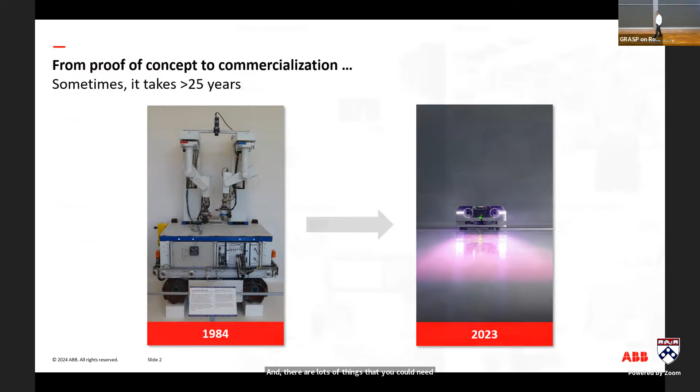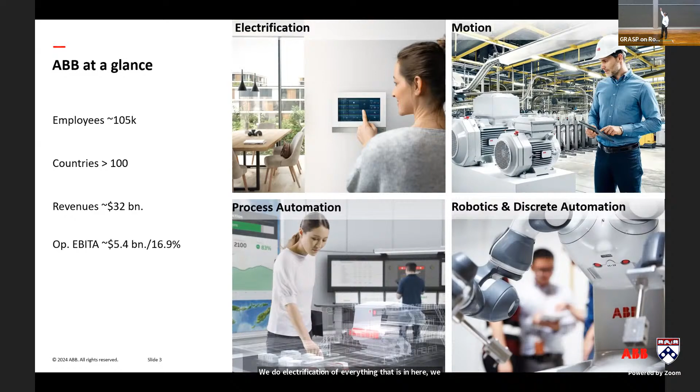There are lots of things you need to consider between the proof of concept and when it actually works. So, our company, we are a large technology company. As ABB, we do process automation—that means we monitor plants, power plants for example. We do electrification of everything that is here. We have the business of motion, and I lead Robotics and Discrete Automation, which, as Kostas mentioned, is about 11,000 employees. We're in 50 countries, and we basically sell robots, but also the solutions around them. That's something I would like to dwell a little deeper on.

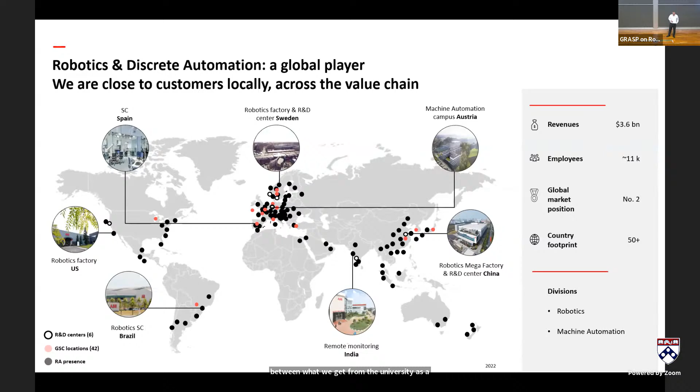How are robots actually embedded in the industrial world? What does it mean for a company? And what is our role between what we get from the university as science, and how we deliver that and make it real for our customers?

So you put it in and the robot runs. This was the first programmable one. It worked for more than 40 years until the company actually did not exist anymore, so they had to shut it down. But it was quite robust—40 years is a quite long time.

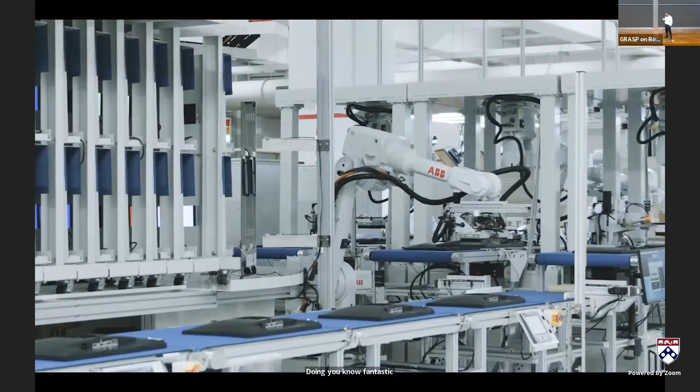And this is how robots really look today. These are applications in automotive where you coordinate multiple robots doing fantastic production enhancements for our customers. So a long way from the initial robotics to what we see today.

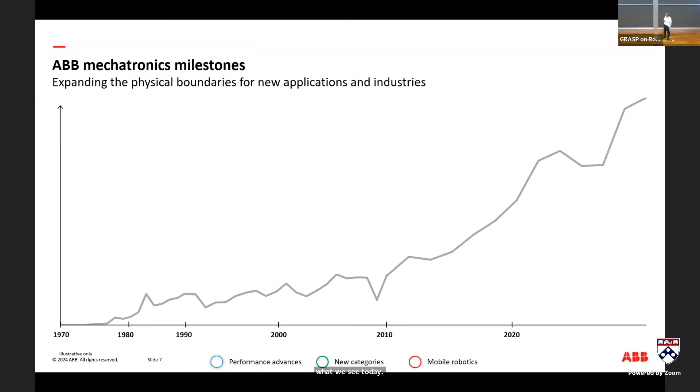Now what happened over the years? These are the number of robots that I'll show you later, why they went up over time. But first, from a robot perspective: 1974, first robot. And then we had many advancements of the same type, either 4 or 6 axis robots.

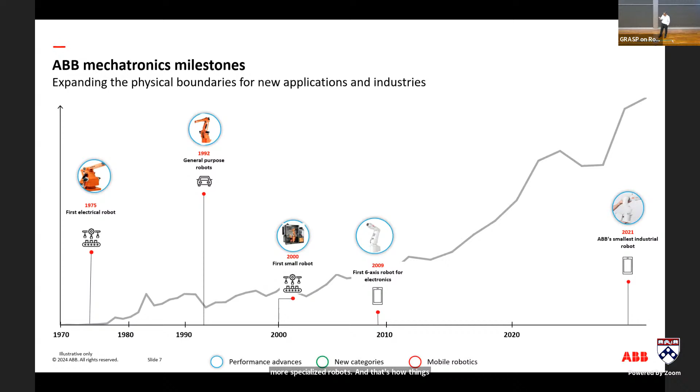And then over time, we saw that there is a need for much more specialized robots. And that's how things were created, the need for not only 6-axis, but others. You can see the first electric drive paint robot—I'll tell you why it's a little bit different using a paint robot than a classic robot.

Delta robots are the pickers. And then we had the smaller robots, the SCARA robots for electronics. First dual arm robot, and then hygienic robot for food and beverage. And then the GOFA, which is a collaborative robot.

Collaborative robots you might probably know about. It's how you interact with the robot—you put it in a place and it interacts with the human. It's also a very specialized robot.

And then we had the autonomous mobile robots get into the industrial world, where you mount a robot on a platform. Now this is the evolution of the mechatronics.

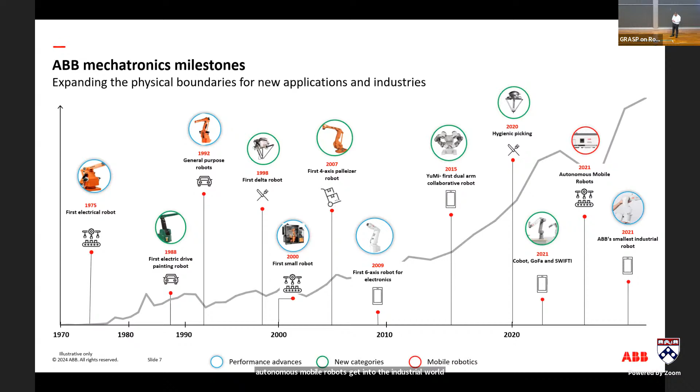But what helped was the evolution of the software as well. First was the whole development of the underlying microprocessors, and that was key to enable robots to actually be programmed. Today it sounds normal, but having a platform to program on was something very unique until the 1990s.

And then there was a whole movement of new software that enabled us to do more new applications. Pickmaster is basically software that allows fast picking of food, or the Robot Studio, which is something I will dwell on deeper.

Robot Studio is a simulation tool that was fundamental for the development of robotics. We use it basically to do everything virtually before we even do implementation. Even the PLC code that we develop on Robot Studio is actually the same runtime.

This is absolutely critical because when you go to a customer and tell them, 'well, this line I will fully automate,' the customer will say, 'what does that mean? I have a running system, don't touch it.' So we show it beforehand, we simulate, we exercise all the safety aspects, and when the customer feels comfortable, we actually use it. So that was critical for the development.

And then we had virtual commissioning, easier programming, which started in the last 5 years. Easy programming is quite important for the development of robots because the complexity of programming a robot is quite immense. And then we put Robot Studio on the cloud, so multiple sites can work together.

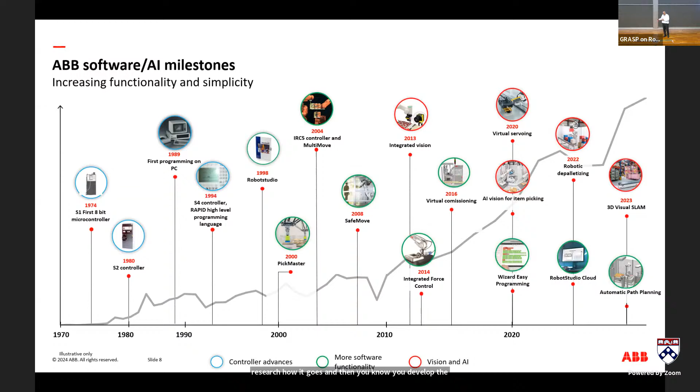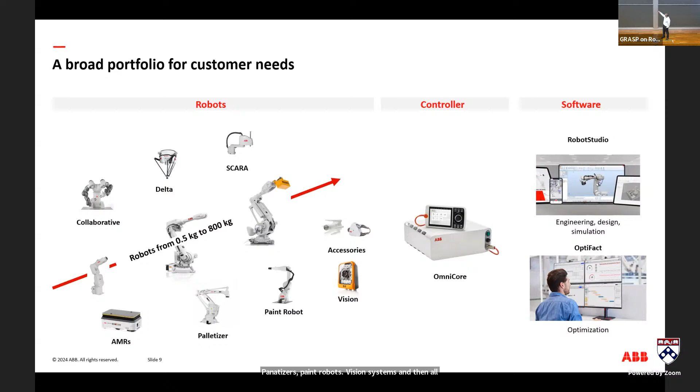So what do we sell today? I thought it would be interesting for you to see, from the platform: AMRs, palletizers, paint robots, vision systems, and all types—we have the full breadth of robots today. OmniCore is the platform I talked about, and then we have the design elements.

Just to show you the type of robots, we have smaller ones that go into smaller applications like electronics, and then larger ones that carry higher weights, size of the human, and then the larger ones are palletizers, and the ones that go into the automotive industry could carry up to 800 kilos.

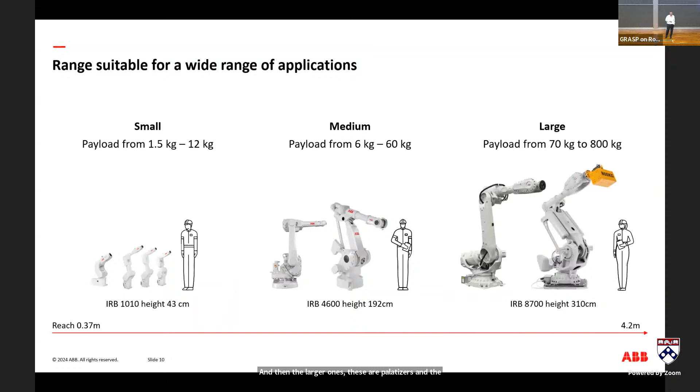And then the huge new generation of collaborative robots, and these were quite important for our customers because when we first automated the parts that don't need humans in the factory, that went quite well. But then we went into the so-called final trim and assembly in automotive, where you have a lot of dexterity, a lot of complexity, unstructured environment. Obviously we would love to have robots that work in an unstructured environment. That means AI would be important, vision would be important, but we're still far away from getting there.

So a solution is a robot that you can basically put and you collaborate with. The robot doesn't harm you if it hits you, but you can also work hand in hand with it. The other reason is that most robots are actually in cages today.

And when you put a robot in a cage, you have to have a perimeter around it that basically takes too much space. But when we go to a factory and see a line that we want to automate, you cannot say, hold on, we will need to expand everything to put real cages around it. It's easier to put a collaborative robot, and the robot will interact with the human, so the human can pass by and so on.

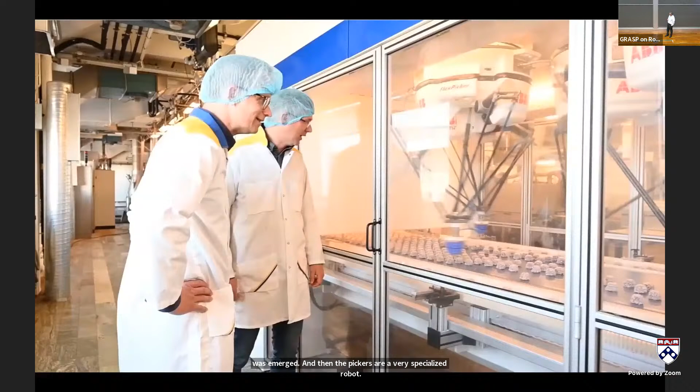That's why the huge interest in collaborative robots emerged. And then the pickers are a very specialized robot that has high speed, can carry 1 kilo, maximum 5-6 kilos, but the speed is about 120 picks per minute, which is 2 picks per second. So a very specialized robot that was needed, and now is really a high runner in the food industry, because obviously you want to pick all these cookies and whatever that is. You cannot have a low speed robot.

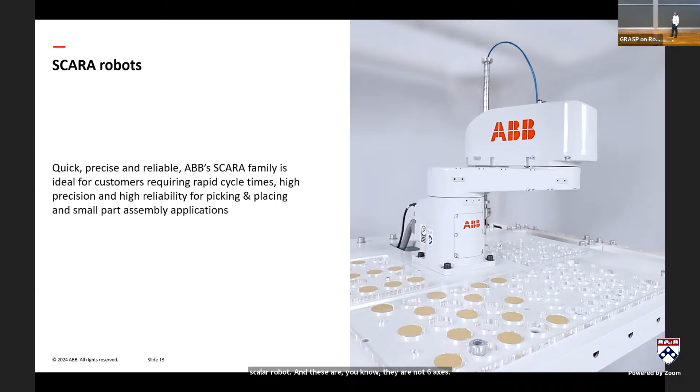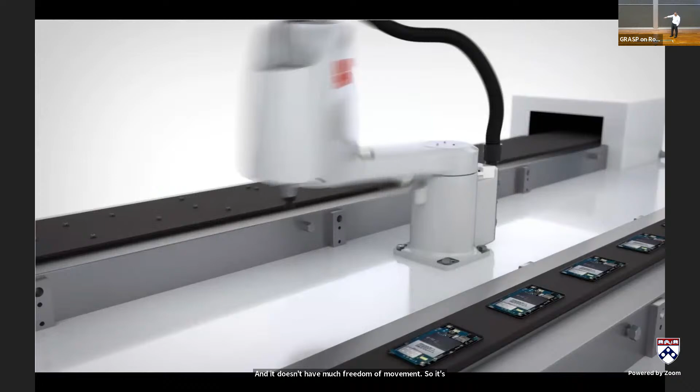And then the other specific application is SCARA robots. These are not 6-axis. This is really a highly specialized robot, highly popular in the electronics business, and it doesn't have much freedom of movement. So basically I wouldn't even call it 3D because it's really planar, but it's called the SCARA robot. And this has a speed of 200 picks per minute, so 3 per second.

Obviously, you have to have the underlying electronics that would tolerate that. But these are all specialized robots that we developed over time for industrial uses. So it's not only the 6-arm that we are all used to in universities. There are multiple others that are there.

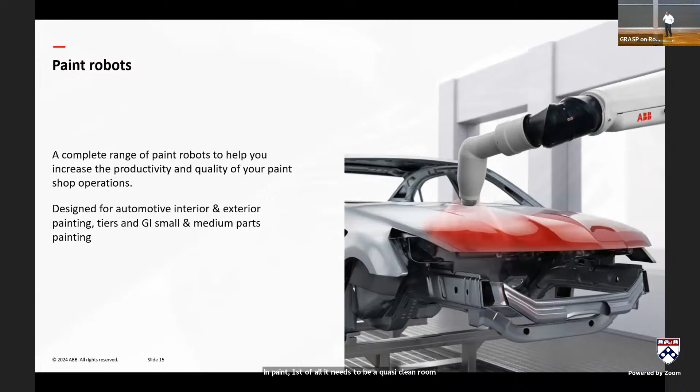Now, the other category is paint robots. You would say, why is this special? In paint, first of all, it needs to be a quasi-clean room where you do painting. And when you see how it works, there's a huge amount of pollution and so on, but the robots, usually to minimize the space, they are mounted on the ceiling or on the side. So they need to be structurally a different robot and need to have much bigger tolerance to the dust and the surroundings, and they need to be highly specialized.

So also this is a very special type of application that we built for automotive that was needed. So it's not always the same robot that is tuned, but really a special application.

Now, what is interesting to see is that tooling in all the examples you saw is key. So we develop our own tools, but we also buy tools like grippers for food. Until today, we did not solve the dexterity problem, which is grab an egg or a cookie, don't destroy it. It sounds easy, and many think that humanoid robots will be around us soon. Let's see - we're not able to do that in industry so far. So we build tools. We build tools to grab things, to cut, to weld, and they need to be really customized to the object that you have.

Obviously, we would love to have something like a hand of a human that has a lot of knowledge embedded in it without being needed to be programmed every time, reprogrammed. So that's also a phenomenon in the robotics world.

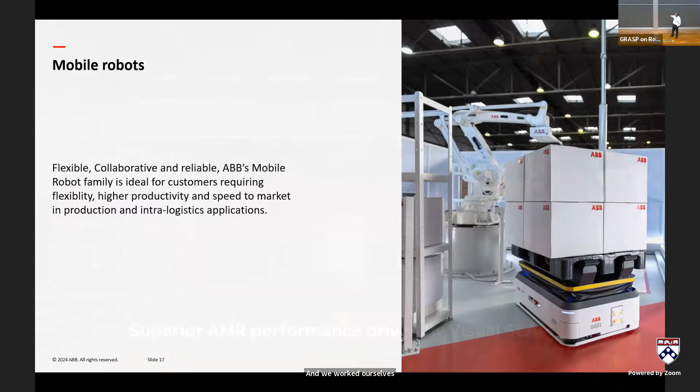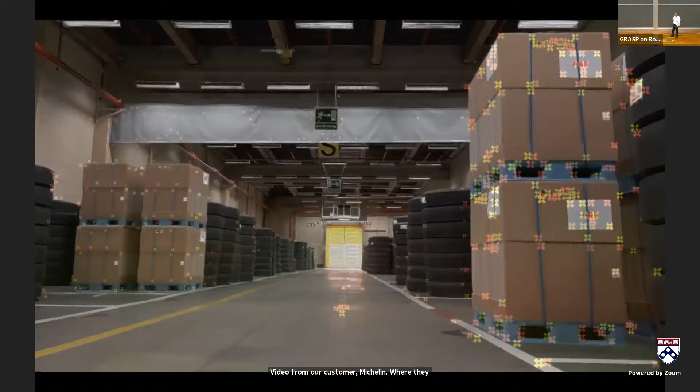And now we bought a company, 7Sense. It's an ETH spinoff, and we worked on the navigation, which is a VSLAM at the end of the day. And now it's working, and it's phenomenal. Customers love it. This is a video from our customer, Michelin, where they implemented it, and it's basically localization by motion.

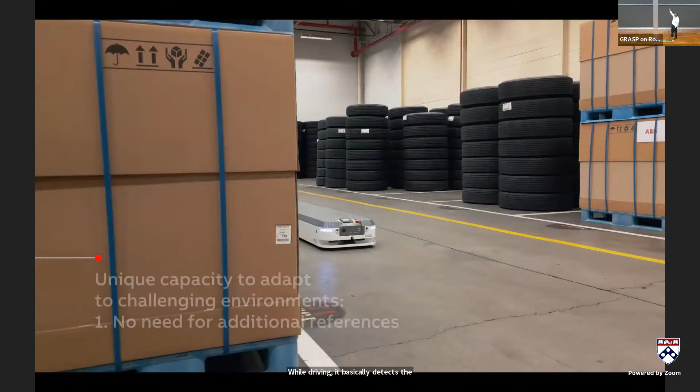While driving, it basically detects the edges and puts it in a map. And while driving, it creates the map, but it also prioritizes the items it sees. For example, if it sees certain boxes, it doesn't put them in the map at high priority. It keeps them as variables. And then it constantly makes it more accurate.

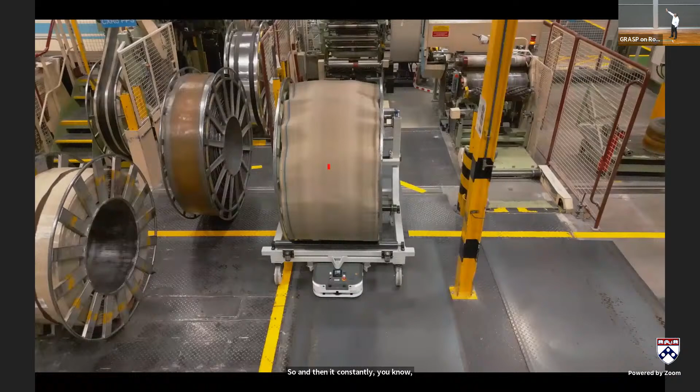And this is purely on vision plus odometry. The accuracy is plus or minus 5 millimeters, which is quite high. Even with slippages, it manages to work around it. I mean, whoever worked on these, I still remember slippage is a huge problem because odometry doesn't help you everywhere.

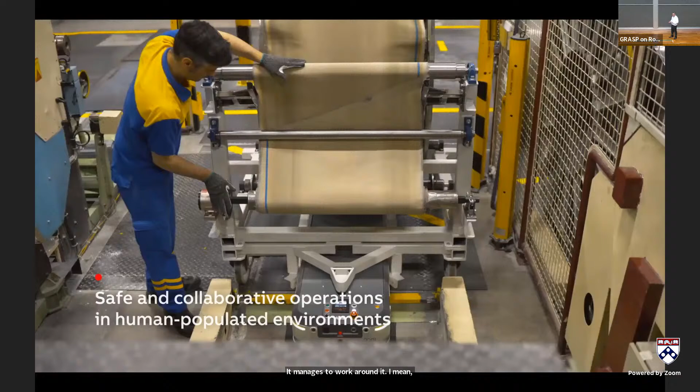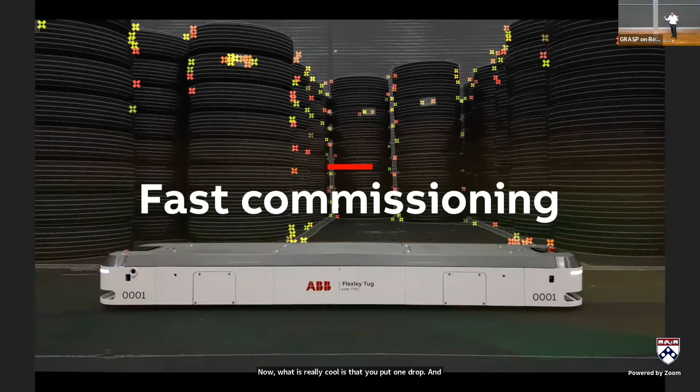Now, what is really cool is that you put one robot and it starts learning, and the other robot in a different part, so they all communicate and create a common map, and then they're able to navigate. It really eases up the commissioning and so on. So Ford loves it, Michelin, and many other customers now.

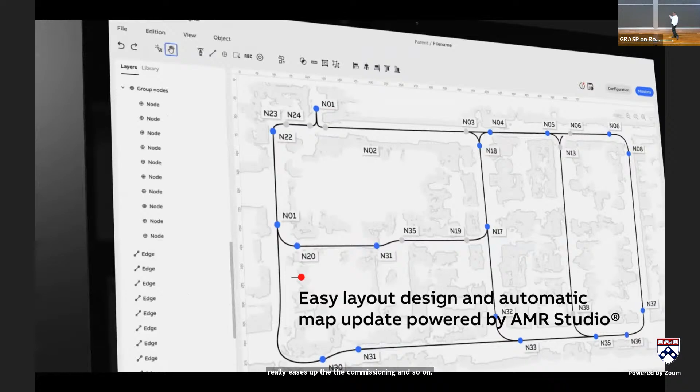And I think, for me, it's also a lesson learned how long it took from initial concept, because what we worked on at that time was basically stereo navigation using landmarks, trying to figure out the model, how to map, and how to map the uncertainty using data fusion. We did that also with Greg Hager and other colleagues, and now it really is working.

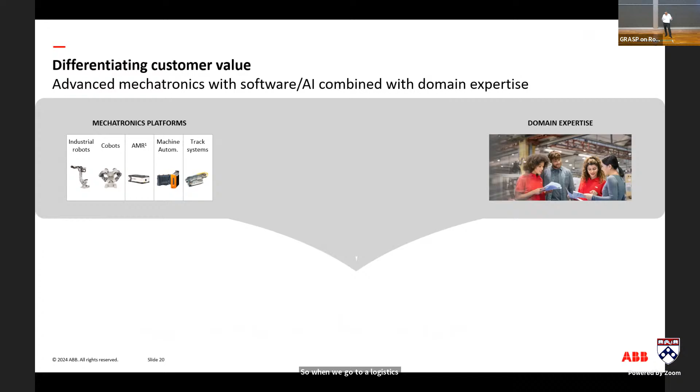Now, what is it that, how do we think about how we create value for our customers? First, we need a platform, which is the robots, the actuation, the mobile. The other thing is we have domain expertise. So when we go to a logistics or any e-commerce company, we need to understand what it means to work in that setting.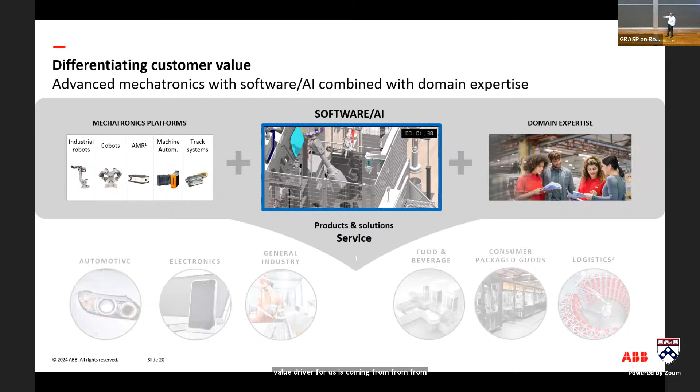And then we have software. Now, over the years, software has become the biggest value driver for our robots. So obviously mechatronics is still important, but the value driver for us is coming from the software. That's how we started in automotive, but then we can model, we can create digital twins, and then we go into other industries. So we started in automotive, electronics, general industry, food and beverage, consumer packaged goods, and logistics.

These are all the new areas of growth. Still, automotive is quite interesting for us, but the shift changed over time from these industries to the others. Now, this is how the technology stack in our robot world works.

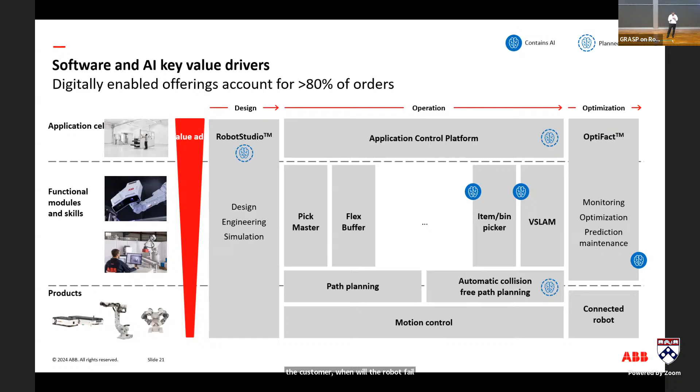We have the product, we have the functional modules, and then we have the actual applications. In parallel, we have RobotStudio for design, the simulation, the motion control, the path planning, and then all the specialized applications that go on top. And then all our robots are connected remotely, so they're born digital. Whenever we install them, they get an address, and we can connect them and get all the information, and we do remote monitoring. We can tell the customer when the robot will fail. We do pattern recognition on them, and these are all services that we provide.

Now, maybe let's go into this. So RobotStudio is basically the software that I talked about. We do the modeling of not only the robot itself, but the whole cell or even the line. And we go through it, as I mentioned, with the customer and show, this is how it would look like. We can tune up the speed.

So sometimes the cycle time of 10 per minute is not enough, they want 20. But then we have to adjust other things. And you see the fences, the safety, all of that is part of the offering that we do. So we cannot just put a robot there with a payload of 30 kilograms, high speed, and without a safety concept for it. So that's how we actually deliver the value to our customers.

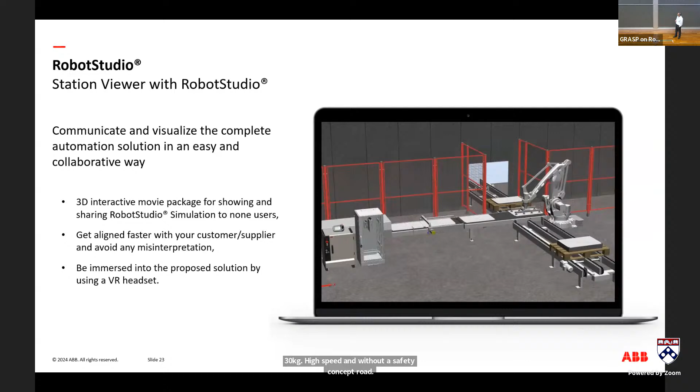And then the newest development of RobotStudio, we have it as an app. So we can go to a customer.

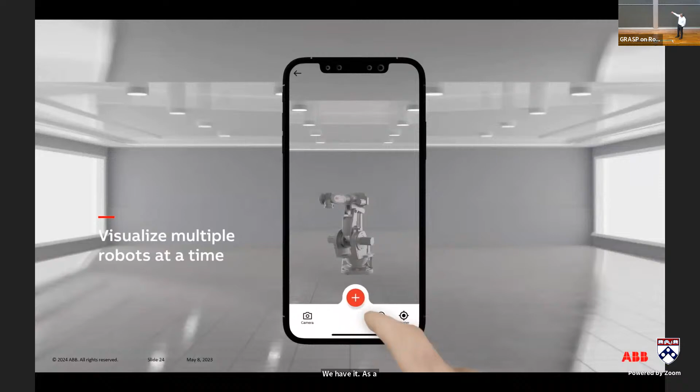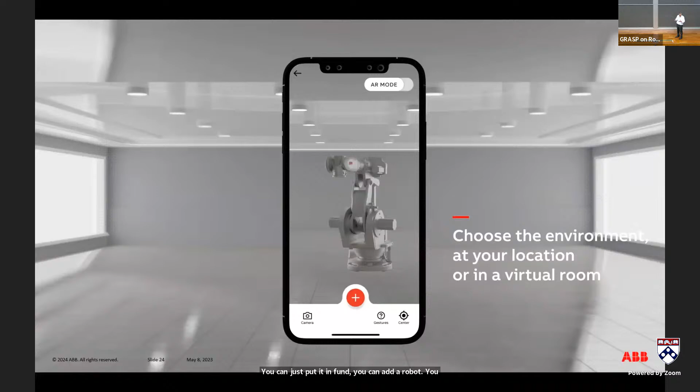You can just put it in front. You can add a robot, pick the one you like, and it's all done virtually. You can basically design the setting for the customer, even add a tray and what have you. So this simplifies for the customer the access to robotics.

You can't imagine how important this is for customers, because this is high tech. When you come and say, I want to put a robot in place, it always creates first anxiety - don't touch a running system. But then we can show that it actually works, it's easy, and so on. That's how we drive the value.

And this is a cool example of how we use RobotStudio and virtual design. We did an experiment with the jungle keepers in Peru, where we helped them with a robot to actually plant trees in the Amazon. It was all remotely done with this AR tool. Just have a quick look.

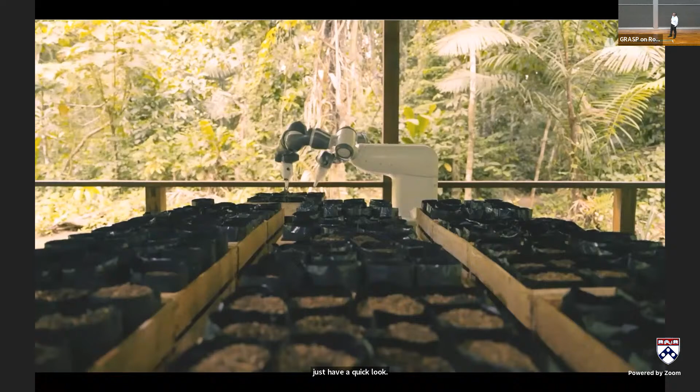So the robot would automatically plant, I don't know, 500, 600 trees per half a day. It was an experiment that we did, and it was quite valuable because people did not want to move in that area. So we put the robot there, and it was really doing the plantation of these small trees. You can think, if you multiply that, how robots can add value in an area where we didn't think that was possible before.

Now, how did this evolution happen? Always you have new technologies that come from universities, from our labs, and we have customer needs - that's where we see the growth coming from.

Over the years, there were interesting patterns. From the 1970s to the 1990s, there was the initial automotive growth, then new variants came in. Interestingly, between 2010 and 2020, there was this hyper growth, which mainly came from China and from electronics. These are the number of robots installed worldwide - we're now above 500,000 robots.

Electronics needs smaller robots, and the value is not as high, but they're smaller. In China, I'll show you later how the density of robots rose to a level that now half of the worldwide installed robots are in China. Every year, 500,000 robots installed in 2022 - 250,000 in China, 250,000 in the rest of the world. So it's the production hub of this planet, which is quite important to know, how these dynamics of this industry actually work.

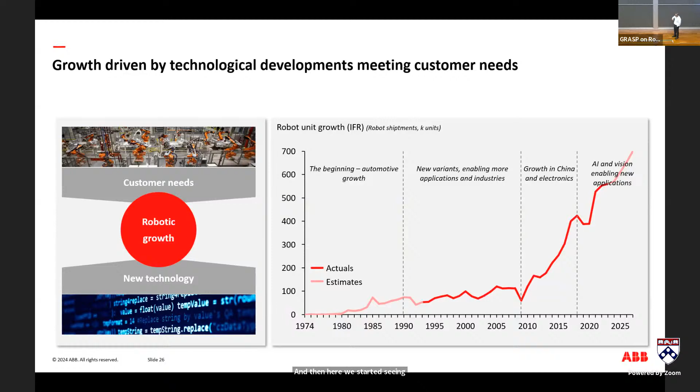Then we started seeing AI and vision driving more applications. Now, what is driving the need for robots? First, it's the individualization of consumer. When you hit the button that you want to buy something from Amazon, you can't imagine the actual chain behind it that makes it happen that you get the delivery next day. It's a huge request on the logistics, on the retailer, and the manufacturing, and that needs robotization.

Digitalization is a big trend. Labor shortage is probably the most important one that is here and here to stay. In the United States, we will have in 2030 more than 1 million open jobs just in manufacturing. There are missing about 300,000 welders in the US. So if you want to reindustrialize the United States, it's not going to happen without the help of robotization and automation.

And then last but not least, uncertainty. After COVID, after all the geopolitical challenges, all countries are trying to reshore, to bring back home manufacturing, and that means you have to add automation. If you want in the United States or in Europe to reindustrialize, you cannot do that because there are no workers. So there will be a huge demand for robotization.

It used to be that productivity and quality were the key drivers in robotics - I wanted to reach more, and the quality to be high. The new drivers are now flexibility and simplicity. Make the robot simple, make it simple to get access, because smaller sized companies don't have PhD workers there who can program the robot, so they need it easy to use.

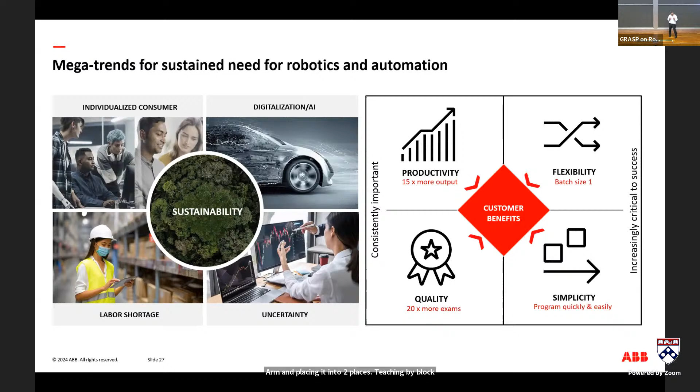We have robots that go into bakeries now, but you wouldn't find engineers sitting there programming. So you have to find easy ways, like teaching by observation, teaching by grabbing the robot arm and placing it into two places, teaching by block programming. These are all areas we are working on to make robot access simpler, and that drives the demand for robotization. The areas we work on in terms of research are autonomy, image processing, mobility, and more analytics and AI.

These are the four areas that we research internally, but we also collaborate with outside, and these are the areas where we also acquire companies or startups. For example, we bought a company that does texture imaging for surfaces and mobility, and we bought a robot company that has mobile robots plus the software and autonomy. We work with universities and others on that.

Now, interesting is to see how is this robot density around the world. There's a figure called robot density, which is number of robots per 10,000 workers. So when people talk about robots killing jobs, the average worldwide is about 180 robots per 10,000 workers. We're not close to robots really taking away our jobs.

They're taking away specific jobs. South Korea is the highest, then Singapore, Japan, and Germany. China really rose from 108 to almost 400 from 2017 to 2022, so they are now at par with most of the others. The US is also catching up and is now the second largest market.

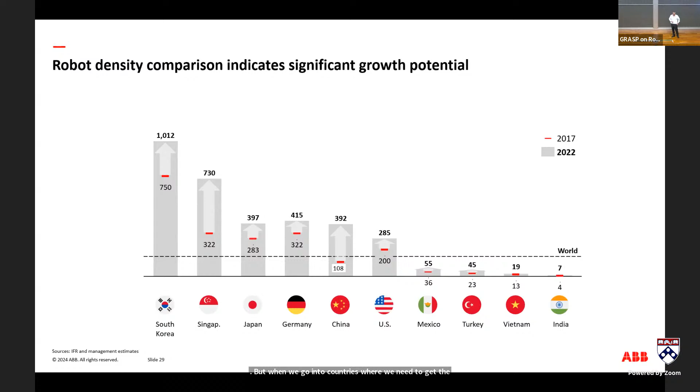But when we go into countries where we need to get the boost, it will not work. We need to have simpler applications. Now, what is interesting is that in 2017, automotive was 123, electronics 122, and the rest was 155.

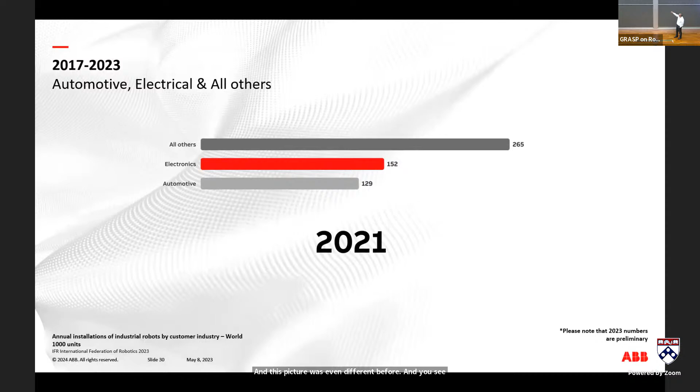And this picture was even different before. You see that all other applications started to increase over time, and then by 2023, we have electronics higher than automotive, and all others the highest. So there's a shift also from demand. Automotive continued to grow, but the other industries like logistics, food and beverage, and healthcare are all on the rise.

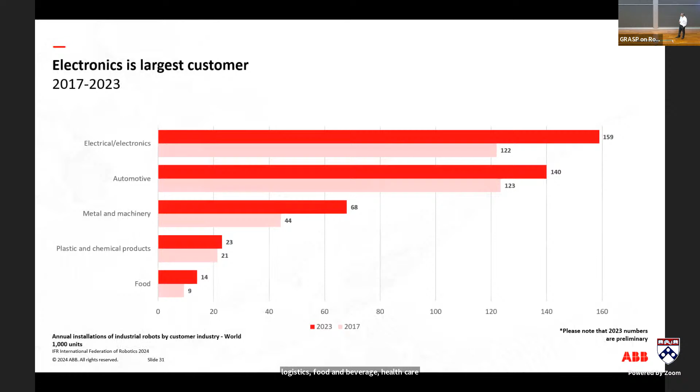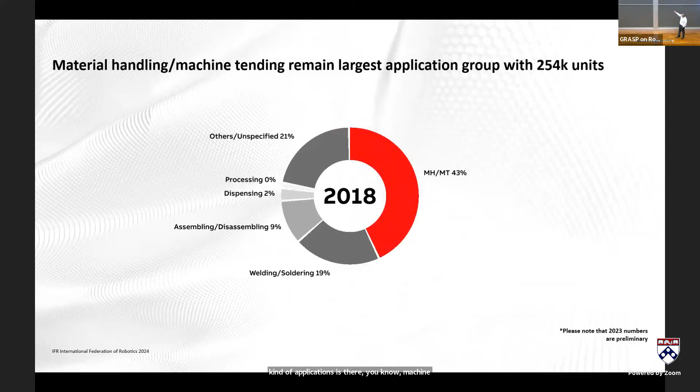If you look at what kind of applications there are: material handling and machine tending is 43%, but that really did not change. Machine handling, which is feeding a machine and handling, was the highest portion. Welding makes about 15-16%. Assembly, dispensing, processing - this is how the applications of robotics actually look like today, which also drives what we need in terms of research and so on.

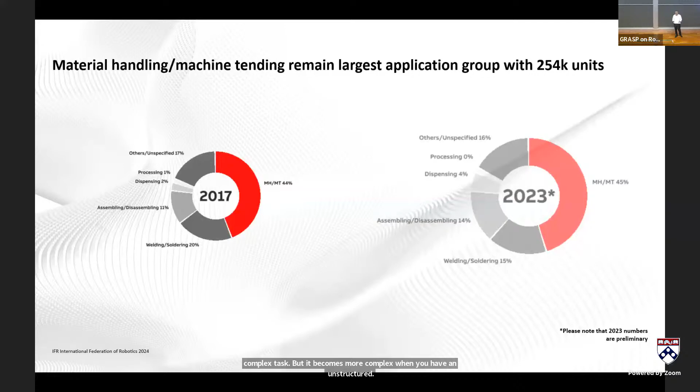We divide applications into two types. One is what we call process, where you follow a path like welding, painting, or pick and place. Pick and place doesn't need as much accuracy, it's a less complex task, but it becomes more complex when you have an unstructured environment, because you want to pick packages for example for e-commerce, and that's where AI will play a bigger role.

How we look at industries is the following: we have industries that are more on the upper S curve, which is automotive and electronics. They continue to drive innovations. For example, now there's a huge demand for battery tray assembly for new electric vehicles, so this is still a vibrant industry for us.

And then we have the ones in the growth area, like food and beverage, logistics, appliances. And then we have rising industries. Construction and healthcare are not new industries, but because of the complexity and unstructuredness of the environment, they have not been addressing automation as much with robots as we would have liked.

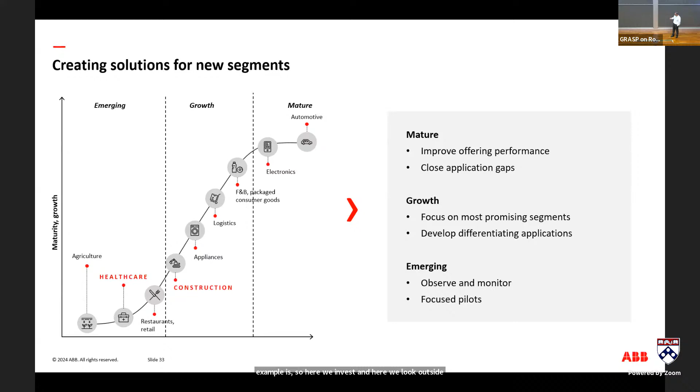Now, an interesting example is construction. Here we invest, and we look outside for partnerships to drive it. Take construction - it's one of the largest industries, with growth of 15 trillion, and a huge amount of global energy is related to the construction industry. So we worked with many companies.

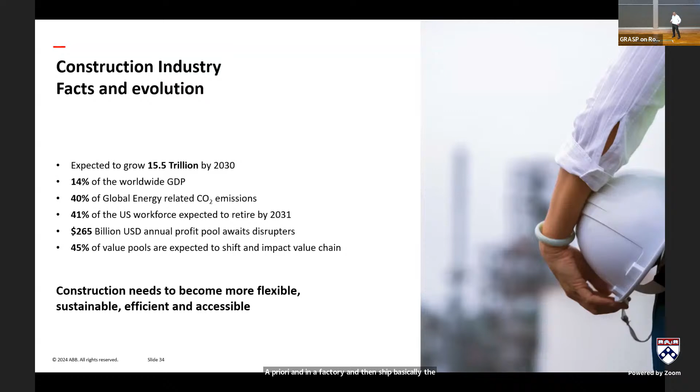How can you manufacture beforehand? How are you going to construct a house a priori in a factory, and then ship the structures to the site and build the house? This is an example where we worked with a customer, Autovol, here in Idaho. Let me let this video run - houses with wooden structure that are pre-built.

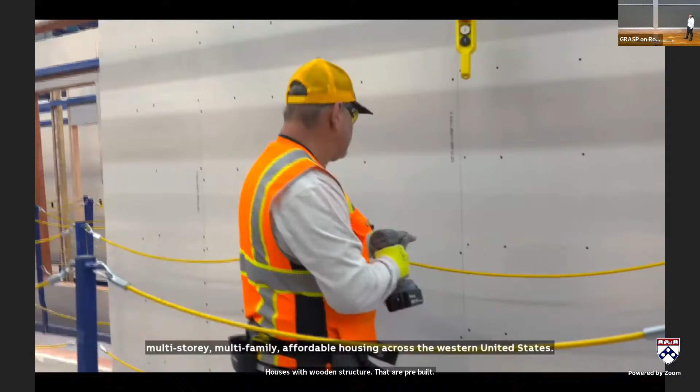Robotics has been a very critical part of all of the stuff.

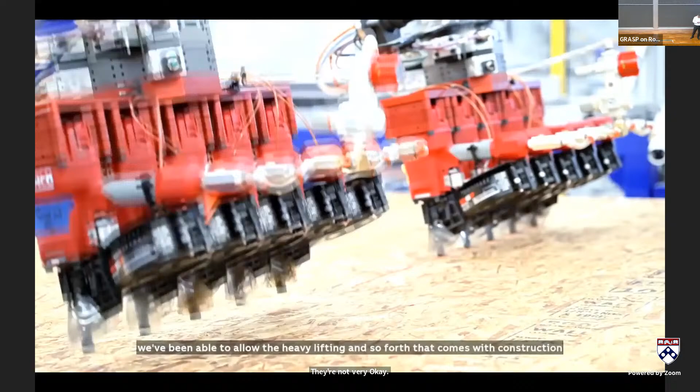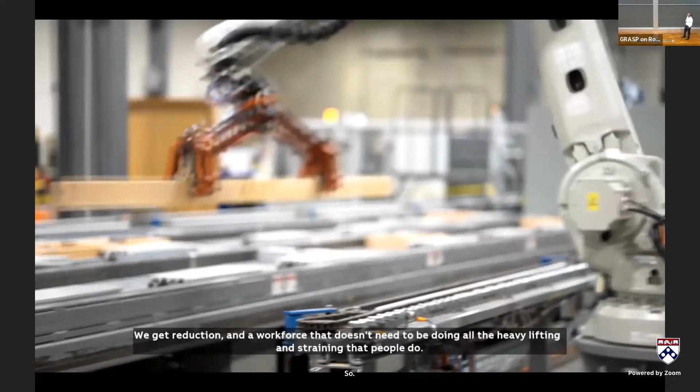A workforce that doesn't need to be doing all the heavy lifting and straining that people do - it's a huge problem to solve. Affordable living, affordable housing, the shortage in labor to provide that, it's not going to get solved unless robotics is part of that solution. So this is an area that is growing rapidly with us, where we work with our customers.

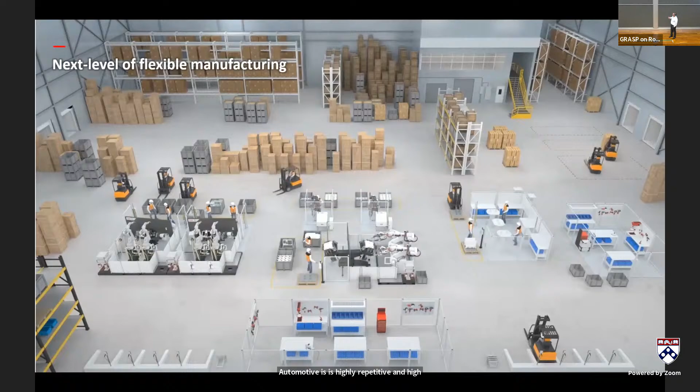In construction, about 25% of what you put on the site is actually waste. So the more you can customize beforehand, you reduce the waste and make it more robust. It's an emerging area, but because that industry is also more unstructured than others, access to it is more difficult. Automotive is highly repetitive and high quality - that's why it was conquered early.

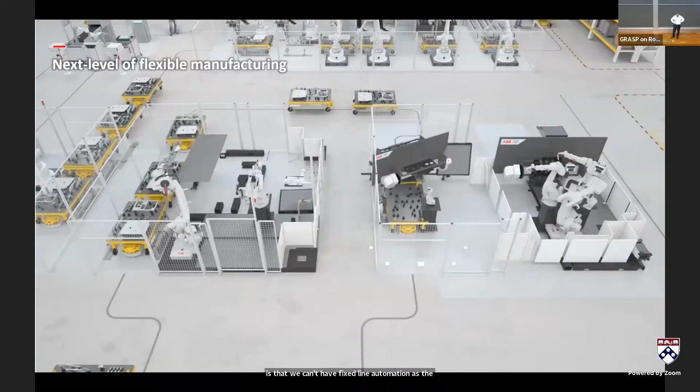The other area that is interesting for us is logistics and how manufacturing will change over time. Mobile robotics in combination with robots are becoming very crucial because we can't have fixed line automation as the standard in the future. We will have cells of automation, and instead of fixed mounted transport, you'll have AGVs transporting material for you. So you have to have coordination between the mobile robots and the robots themselves.

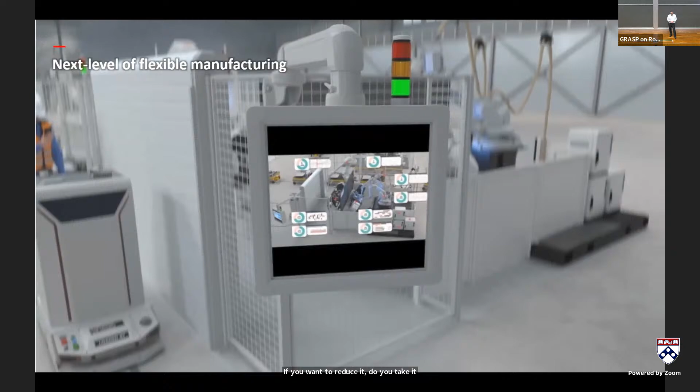If you need more capacity, you can increase a cell or two. If you want to reduce it, you take it out. That's how the manufacturing space will become more flexible. But that means also different thinking - you can't have these fixed lines where robots continue to do the same thing. You have cells fed by AMRs. These are concepts that we work on now with automotive customers to realize.

So when you hit the button to order something, you have to automate retail, consumer-facing fulfillment, distribution centers, and factory automation. All will have a need for automation, and all will be sectors that we would work on.

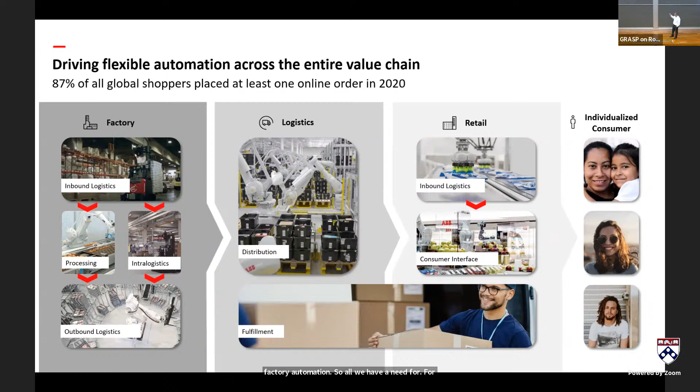An example: usually force sensors are mounted only on the motor, on the wrist side. We added sensors on the load because our collaborative robots, for safety reasons, needed force control at the end so we knew when you touch something. Interestingly, that was a way for us to increase - the accuracy of the robot increased significantly using end sensors at the end effector.

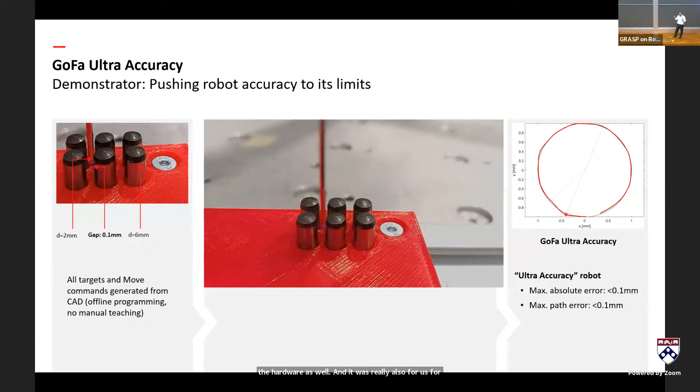This is a movement that was not possible before. It has a tolerance of 0.1 millimeter just by adding a sensor - we didn't touch the hardware. It was really something for us, for the mechatronic colleagues - wow, just by using software and an additional sensor, how much accuracy you can actually increase.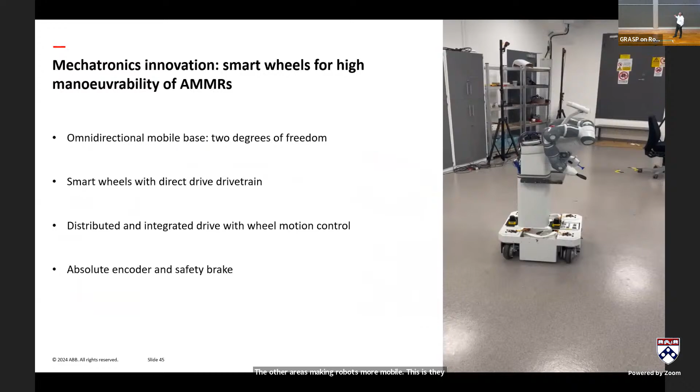The other area is making robots more mobile. There's research we're working on, especially for laboratories, where we need robots that do omnidirectional movement, and we mount robots on them. The other area, which you're quite familiar with, is robots with known items in unstructured environments, and then unknown items in unstructured environments, which would be the holy grail of robotics. These are areas where we're working on.

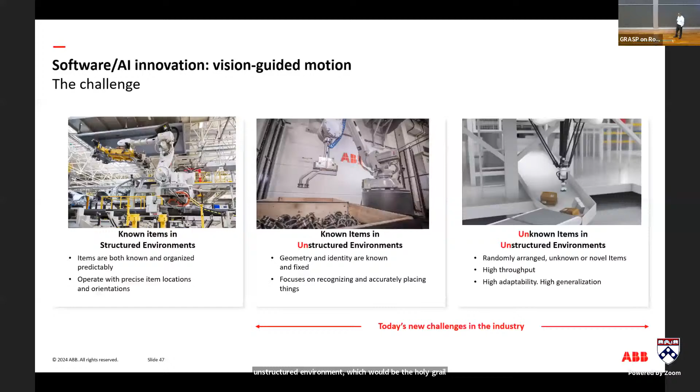And then last but not least, how we can use Gen AI and natural language to... this is in China, where we're experimenting with this.

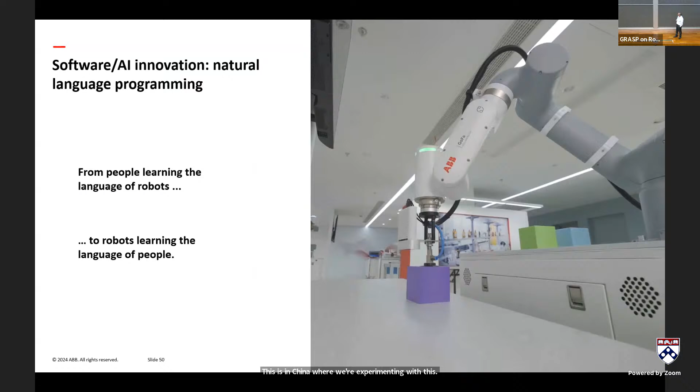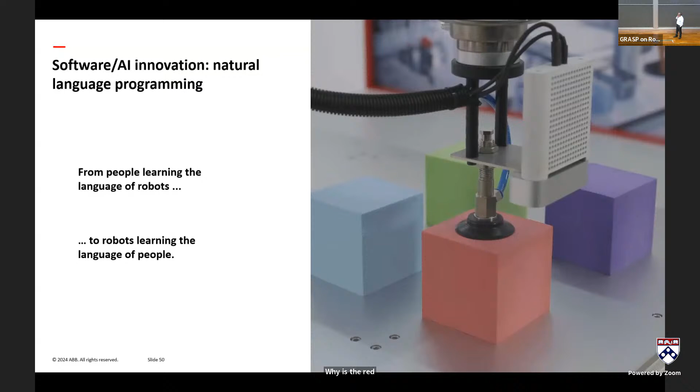For those in robotics, this is not an easy task - to say 'all the box.' What is 'all the box'? How do you interpret what the red box means, or put the red box on the other table? Obviously, using natural language here will be much simplified with Gen AI. This is not available for sale yet - it's an area we're working on. At the moment, Gen AI is a little bit hyped, as if you can solve every problem with it, but I think there will be specific areas.

We all know in AI that you have to basically confine the problem in a certain space, and generalized AI, in my opinion, will take some time. So, but it's an interesting area of work.

So I promised to give you a quick overview of what is happening on the side of AI from a company like us.

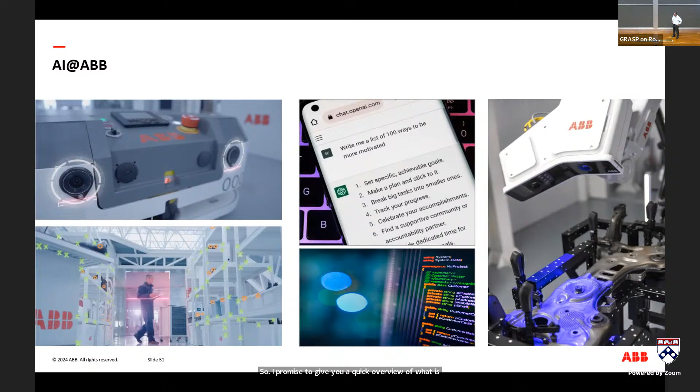Obviously, you know the hypes of AI. I personally think that the maturity of AI has been growing, and we have the AI winters and summers, and we have been researching now for more than 10 years on AI. Obviously, the question is, where will this go? Even if we would have an uptick in expectations or down, the maturity of AI will continue to move. So I tell colleagues, don't get discouraged if this thing will at some point go down. It will. We are in a stage where everything extrapolation is just getting into being too much. But obviously, we know that the maturity of AI will continue to go.

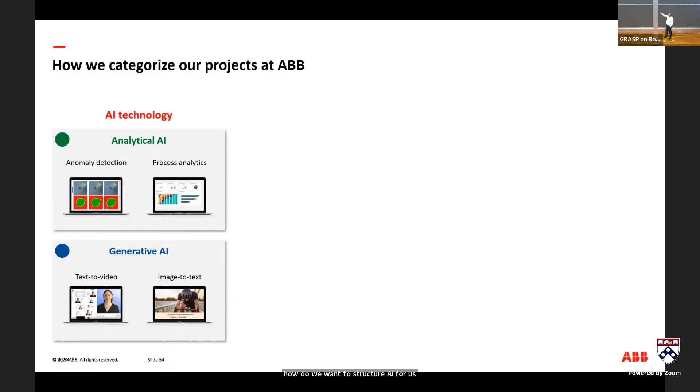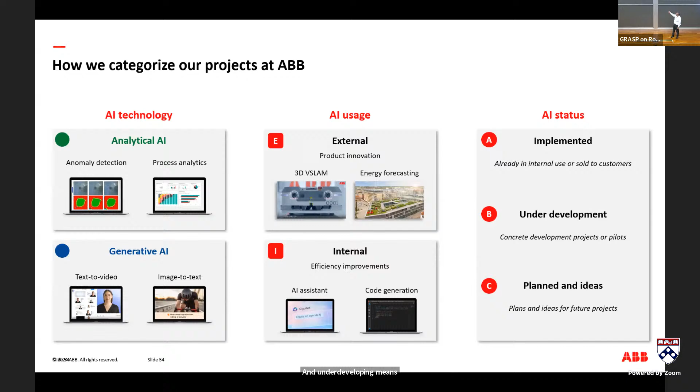So for us, we decided as a company, how do we want to structure AI for us? We said either it's analytical AI, so pattern recognition, or it's Gen AI. Either the projects are external, so we use them in our products for our customers, or we use them for internal efficiency improvement, like AI assistant code generation. These are quite powerful tools that we can use to improve productivity. And then we said the project could be either implemented, under development, or planned. Implemented means it's real, and under development means it's going to be real in 2 years. Then planned, these are the ideas that usually generate the hype. This could be possible. This could be possible.

So what did we do? We scanned the whole company. We have more than 100,000 employees, and we received more than 100 projects. Real projects are out there, and many of them implemented, like VSLAM, Move and Pick, and in other areas of ABB. But we also have a lot under development, like a customer contact chatbot, where we allow our customers to use a chatbot to contact us. And then we have a huge pipeline, like HR. When you want to know some rules, you don't have to search books, you just use a chatbot for that. I mean, these are areas that I think will have value.

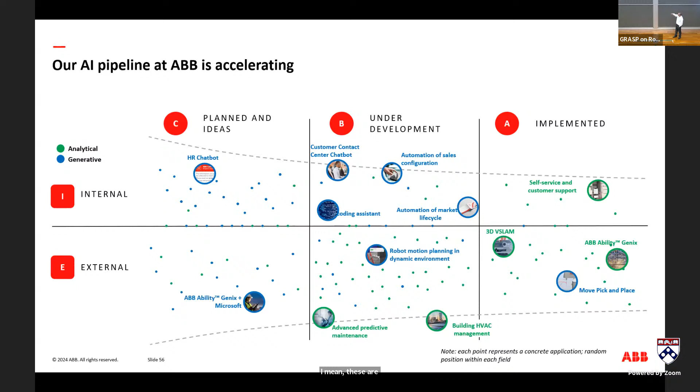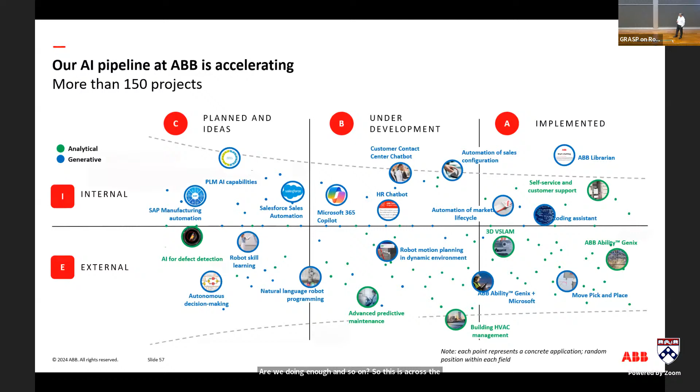These are just some examples of how across ABB we use AI. This is a cool one. This is an offer we have today. In a building like this, it monitors the movement of people in and out, temperature outside, temperature inside, and it regulates automatically based on pattern recognition the temperature and the inflow, and reduces CO2 emission. Very, very simple. It's an offer that we have today.

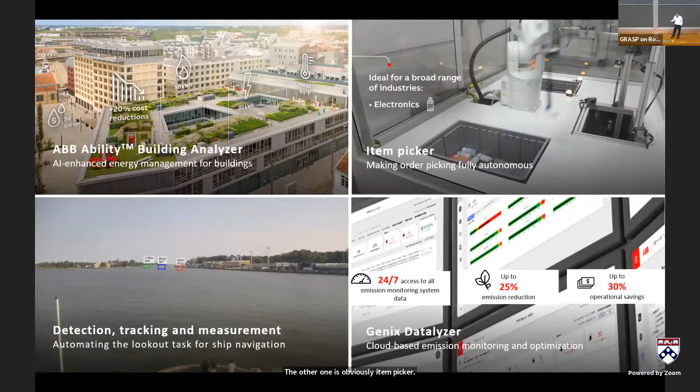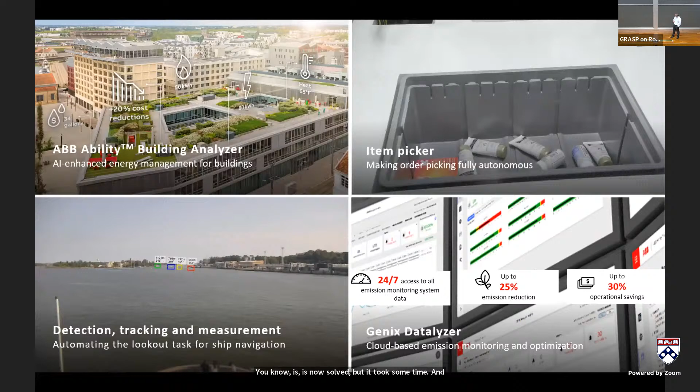It's pure AI. The other one is obviously item picking. That's nothing new for you, but using vision to do item picking is now solved, though it took some time. And then we have a very cool application from our marine business where we do navigation for ships, doing fully automated detection of ships in front for the captain, which simplifies things. This is similar to what we have for autonomous driving, which still needs to pick up, and we're not there yet, so it's semi-automated. And then for internal use, we use AI for coding assistant, which is up to 50% faster.

Customer contact, a very simple example here. You might not be aware, but when we get a project to build a large plant, just to design a motor, we get 200-300 pages of specs we have to read through. So colleagues came up and said, let's put this in a tool like ChatGPT, and it basically puts out what the requirement is for that motor. It's instant, it's fast, and it's quite powerful. That's where I think also the power of Gen AI will be, and then many other applications as well.

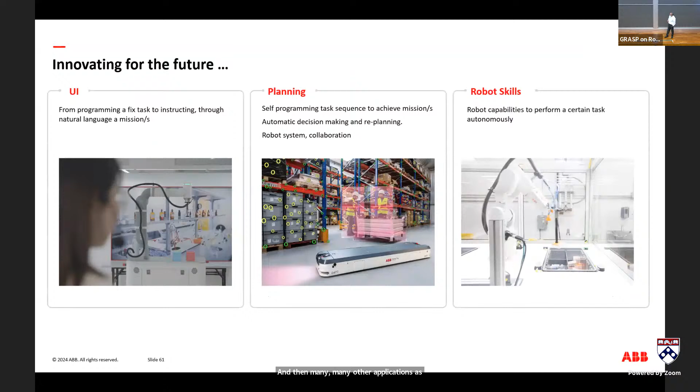So, and this one I can skip. So maybe I would end there. At the end, what we try to do is either do it ourselves, or we try to partner with universities. We don't have UPenn yet on it, but there are ways we can expand that.